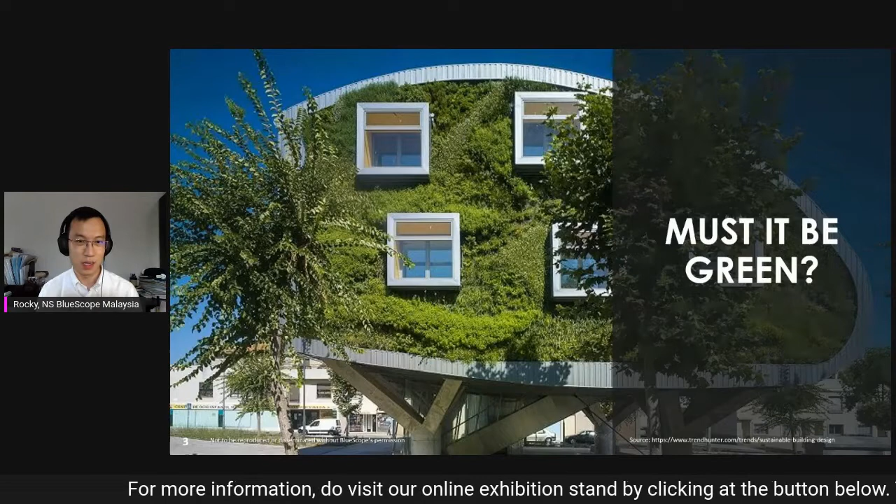All right. So just a bit of background. What are green buildings? Green buildings do not need to be green per se. They do not need to have a lot of greens, like what is depicted in this picture. It is what we call not green but rather sustainable building. So it has to have a large amount of sustainable solutions or designs incorporated within the building design.

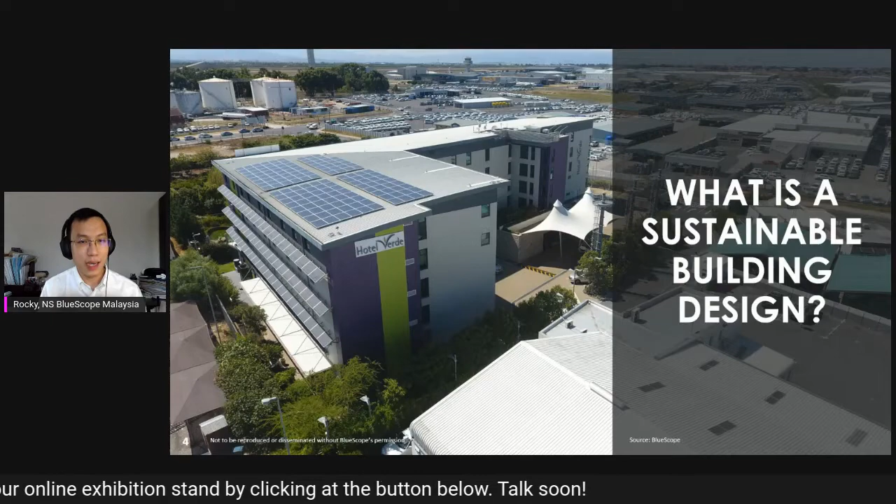Right. So of course, throughout the world, the most talked about topics are climate change, global warming, and all that. So buildings and building design play a huge role in contributing, as well as in the future helping with this reduction of climate change, and also steer the whole conversation in another direction. So of course, each country or each organization will initiate certain types of rating tools to act as a guideline for them to design a sustainable building.

So of course, some of the more recognized ones throughout the world, as well as in Malaysia, are like Green Building Index, or in the US they normally use LEED by USGBC. And of course, some other rating tools like Green RE. In Singapore, they have BCA Green Mark, and so on. Right. So these are some of the green building rating tools.

Of course, in order for you to achieve so-called green building according to these different rating tools, you might want to incorporate green building products or green building designs. So there are many ways you can achieve it. But for metal roof, of course, there are a certain set of points and a certain set of designs that are already out there for you to choose, right?

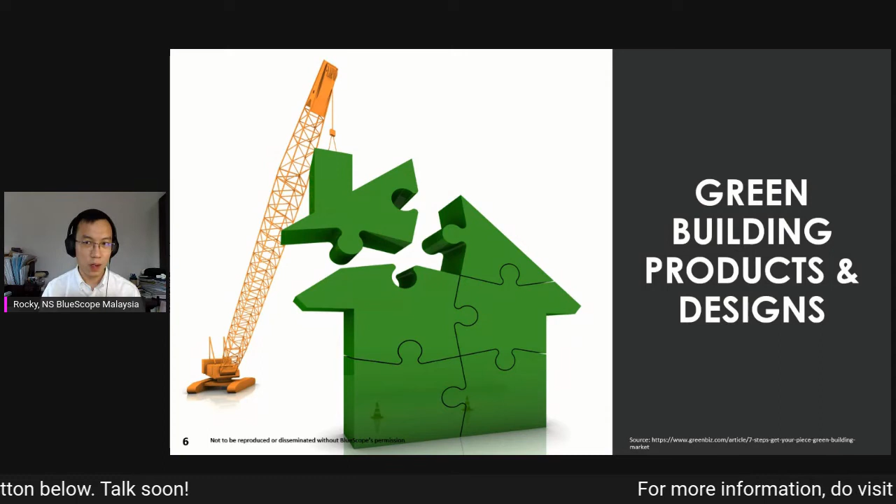So for metal roofing, you can actually look for some of the certificates that are already evaluating metal roofing as a green building product, something like SIRIM Eco Label, which can evaluate the raw materials and manufacturing process, whether it is sustainable, whether it affects the environment for the production.

Or in Singapore, they have this thing called Singapore Green Building Product, which is a certification of a product. So for coated steel, for roofing material, they do offer such a guideline of how to quantify, how to classify the product as a green product, among others, of course, as you can see here.

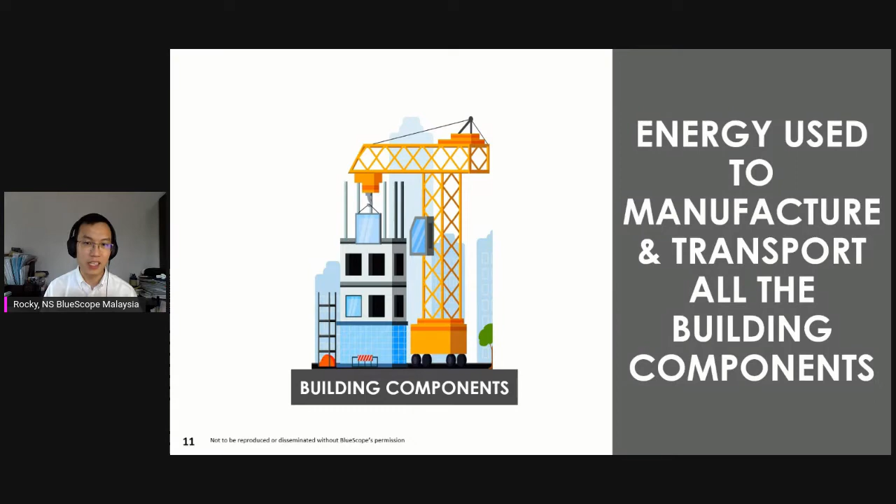Okay, so building components can be manufactured locally, or they can be imported from around the world, depending on the supply chain. So all the way until the end, when the building is constructed, all this process that I just described is part of the embodied energy: energy used to construct the whole building.

So once the building is installed, there will be constant energy supply to this building, be it to cool the building or to heat up the building, depending on the weather. But for Malaysia, it's most often to cool the building. So this energy use is part of the operational energy. And cooling is one of the biggest energy uses to operate a building, of course.

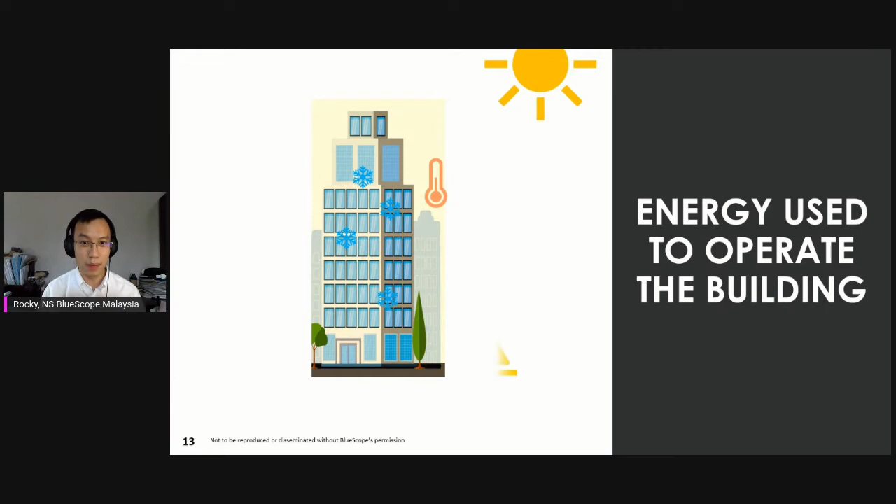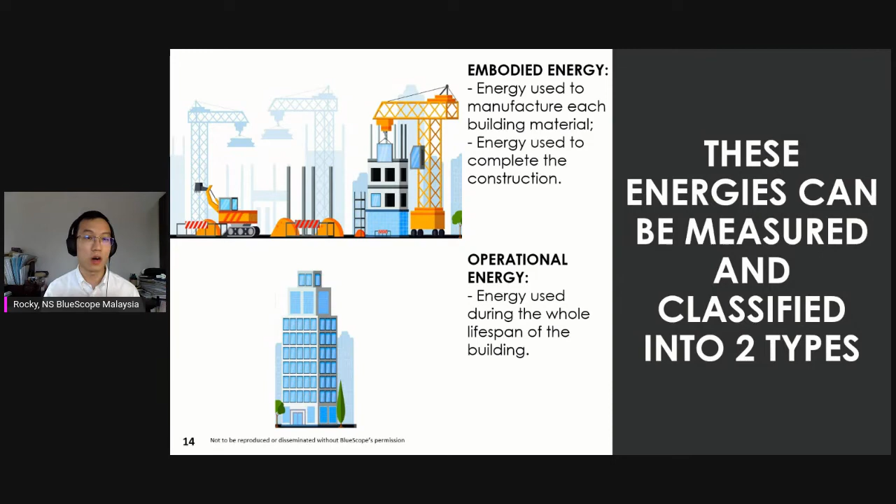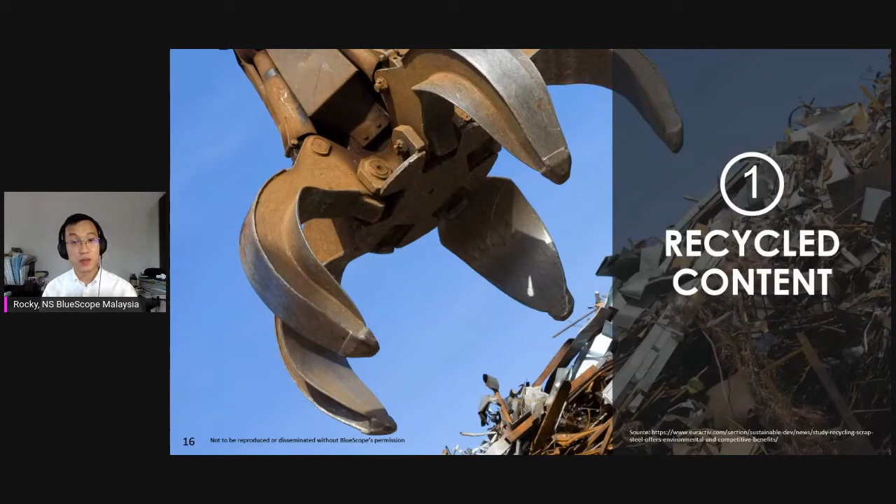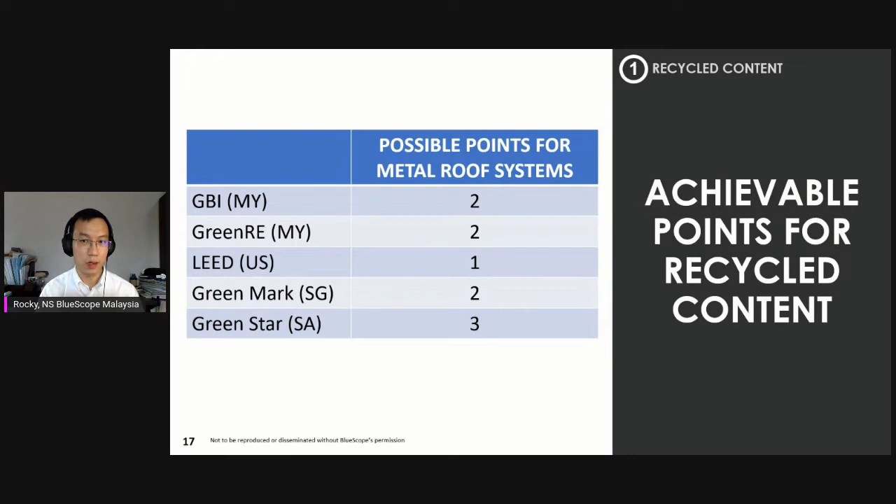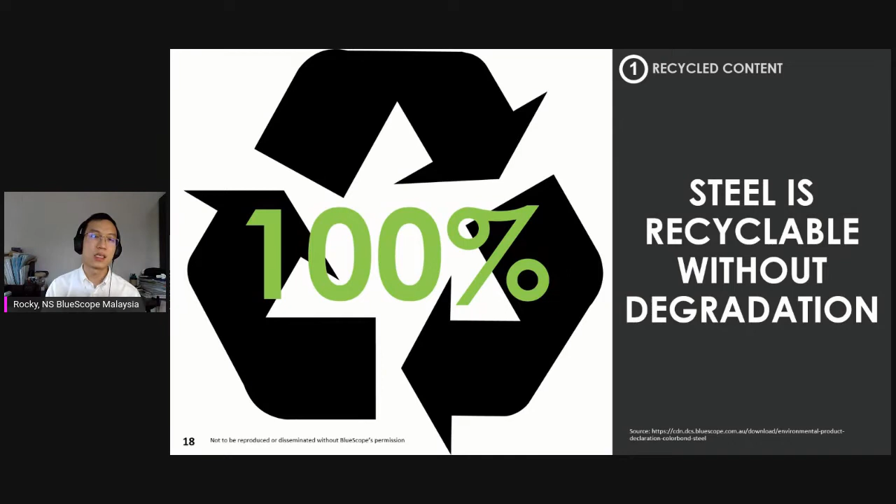So essentially for steel or metal roof, the metal itself is virtually recyclable, and steel in particular is 100% recyclable without any degradation. Meaning, the steel that comes out from the recycling process should give you 100% of the original quality. And of course, this takes into consideration the life cycle of steel.

So here I give you a brief overview, from the raw material process all the way to the usage of the steel, and all the way to recycling and putting it back into raw material production, what we call scrap. Within this process, the hardest part right now is the recycling part, because in building use it can be very hard for the scrap material to be recycled back upstream. So this is where a holistic view of recycled content needs to come in.

Recycled content can come from two parts. One is what we call pre-consumer content, where there are a lot of small offcuts of steel coming from production, from the coating line and all that. And there is another source we call post-consumer content. Post-consumer means that after the building has reached its end of life, the steel content will be recycled to become scrap. These two combine to become recycled content.

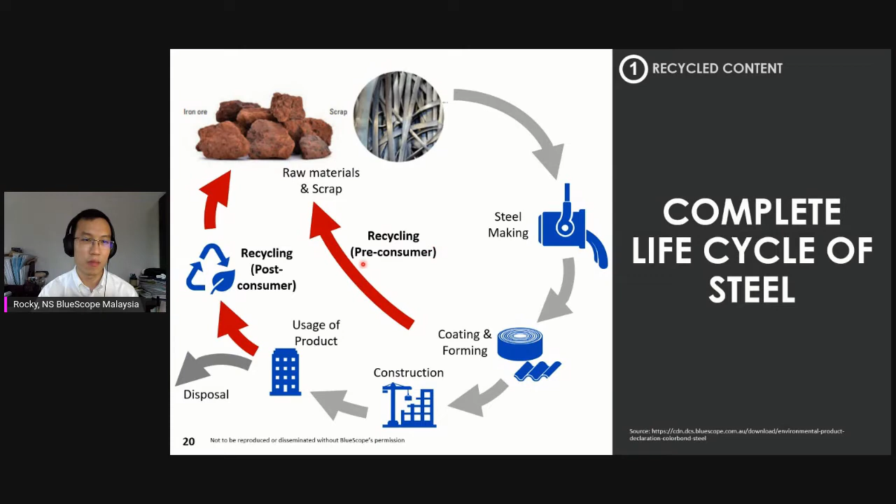And most, if not all, rating tools use a certain calculation for the overall recycled content. It's not as straightforward as adding the recycled content from here and here together. There's a formula: to calculate the recycled content, you add the percentage of post-consumer content and half of the percentage of pre-consumer content. These two add up to become the overall recycled content percentage.

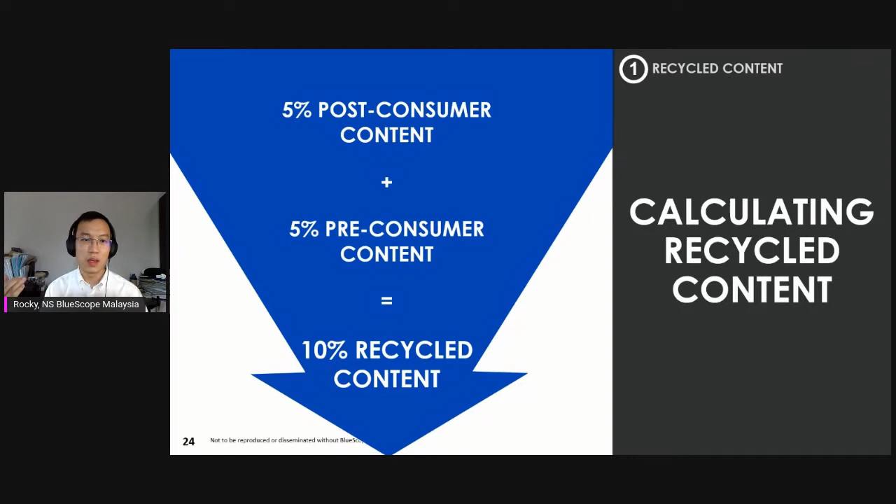So let me use an example. For a block of steel which has 5% post-consumer content and 10% pre-consumer content, the recycled content would not be 15%. It will be 5% post-consumer plus half of 10%, which is another 5%, so 10% recycled content as a whole. And if this recycled content is above 10%, you can score 1 point.

Different rating tools give you different criteria. For example, Green Building Index requires proof that your steel contains at least 10% recycled content. Green RE requires a recognized product certificate, like the SIRIM Eco Label or Singapore Green Building Cert. LEED requires a lot higher, at 25%. And Green Star, used in South Africa, requires as high as 54% recycled content.

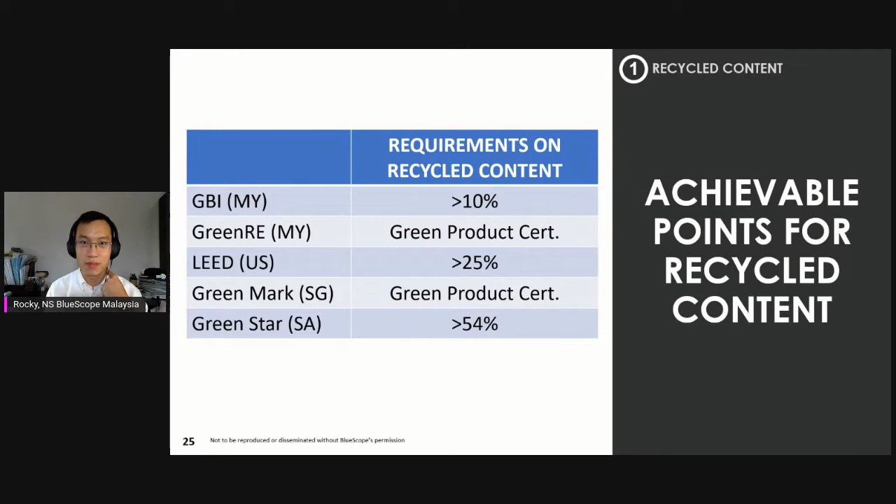So all these are relevant to each geographical location, because in some locations there is a lot of availability in terms of scrap recycling and how it is channeled upstream. Some other countries may not have that, right?

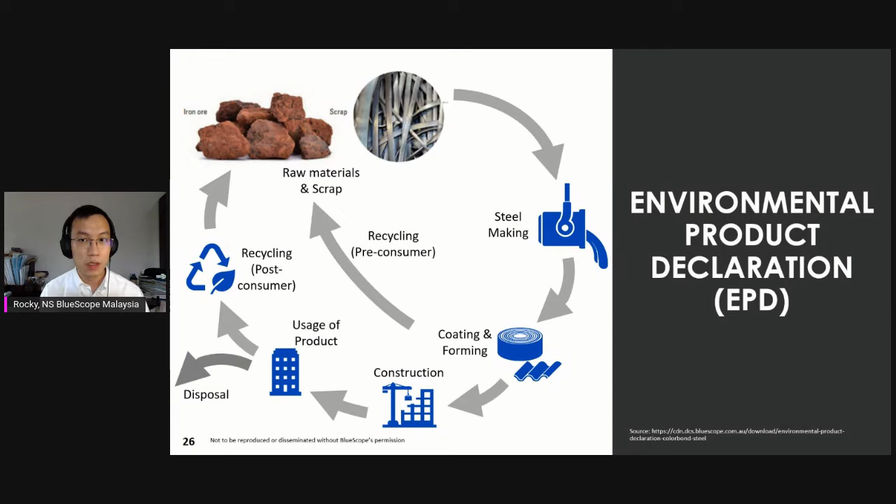So of course, moving forward, there will be a much more holistic view on recycled content. So instead of just looking at the percentage of recycled content, it will actually look at the Environmental Product Declaration, or so-called EPD.

So how this works is that EPD will look at each stage of the process, right? Because at each stage there will be energy used to, for example, melt the steel into molten metal. And perhaps in the construction stage, there'll be delivery from a truck that emits energy also, or emits certain types of pollutants. Then the usage stage, the end of life stage, and of course at the end, the resource recovery stage.

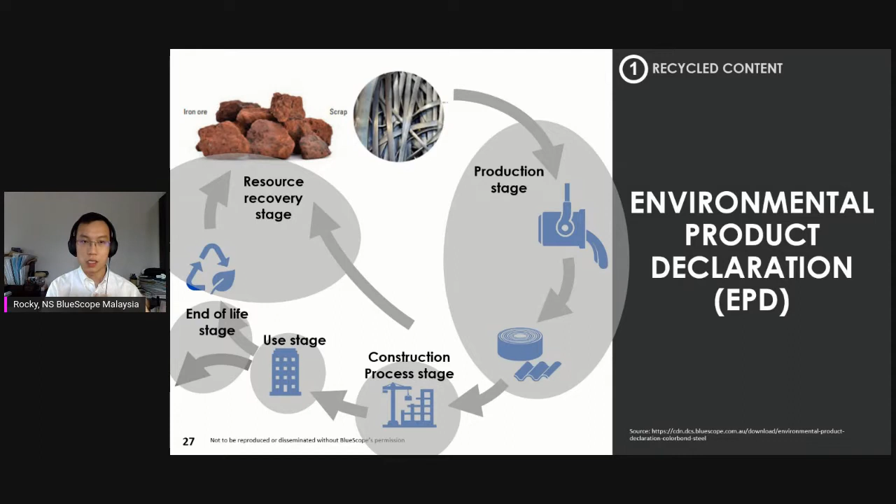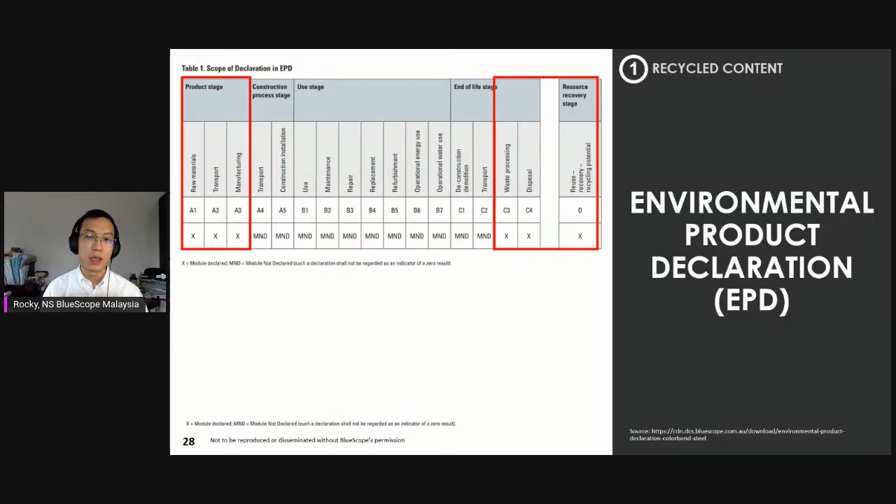So for embodied energy again, instead of looking just at the recycled content, there will be more scopes to be covered. So now there are companies, including our counterpart in Australia, who have already initiated this tracking system where they look at the production stage, as you can see from here, the end of life stage, and also the resource recovery stage. And they will look at how much energy is being used.

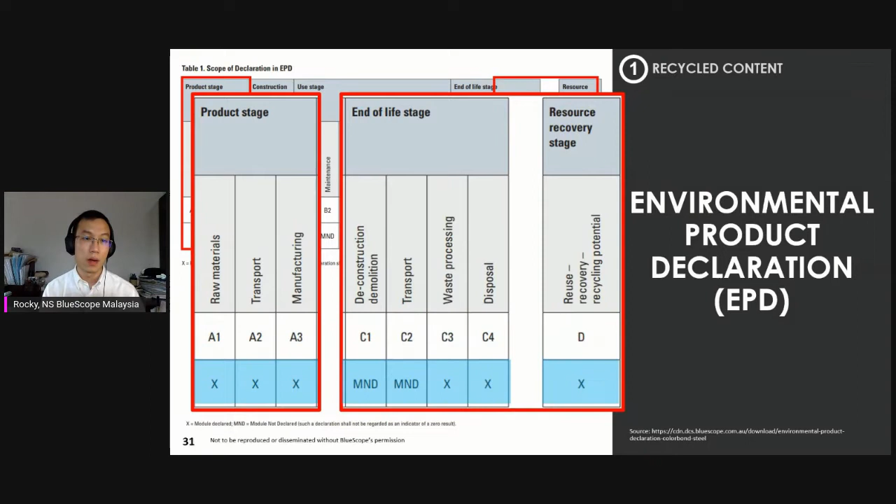So of course, there is a certain classification under a certain guidebook, which will highlight this is stage A1, A2, A3, and so on. So, for example, the life cycle that I described earlier. By considering all this energy use in different stages, it gives a much more holistic view of the embodied energy used for the whole product, from the recycling stage all the way to product usage.

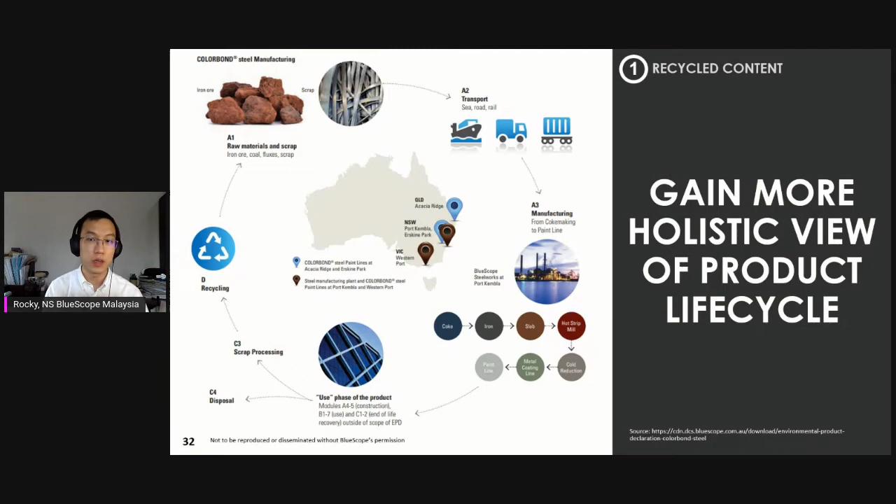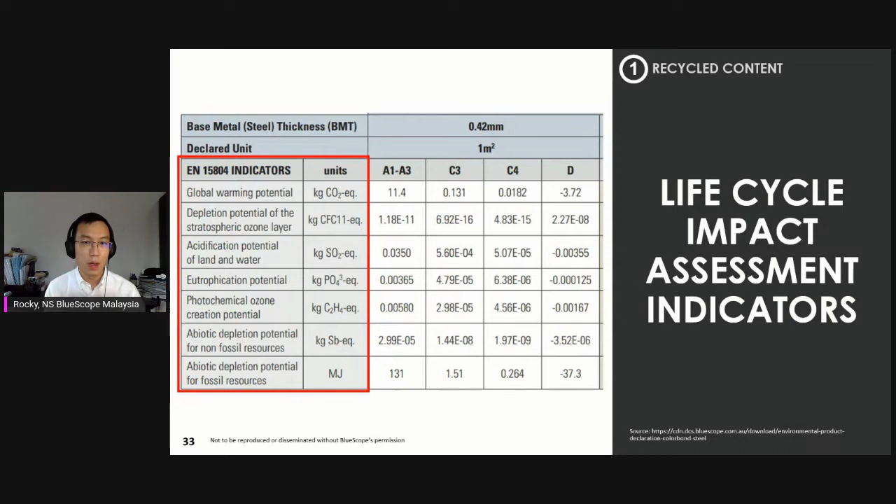So, in BlueScope Australia, this is an example of what they have done. Of course this is a future state for Malaysia, what is supposed to happen in the near future. So something like global warming potential is tracked at different stages of the products. Perhaps the so-called photochemical ozone creation potential, how likely it is to create a photochemical that could cause harm to the environment, and so on and so forth.

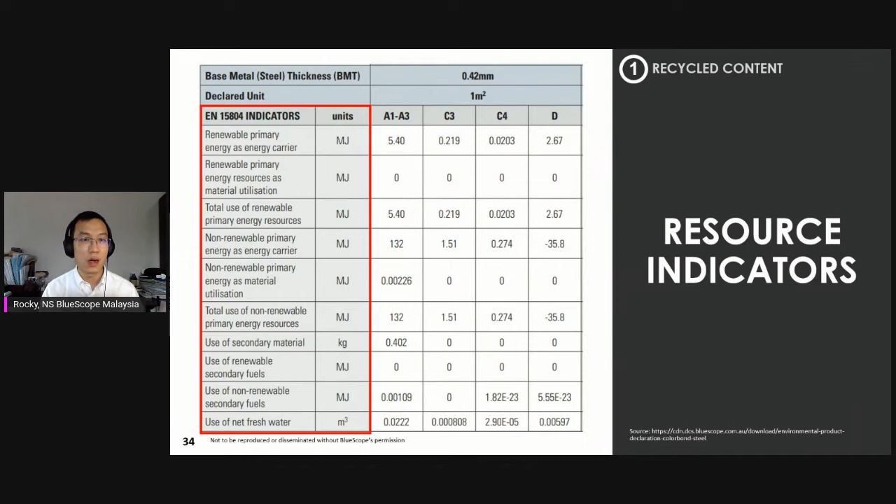And aside from that, it will also track the amount of energy used in different processes. These are very detailed processes where at each stage it will look at the renewable energy use and the non-renewable energy use, like fossil fuel or coal. So this will create more visibility and more accountability in the future, so that when people specify or use steel, they know whether it is sustainable, using less embodied energy or more. So these are some examples.

So again, to recap, recycled content is just the first step to capture how much of the final product is using recycled content. Ultimately the goal is to reduce the embodied energy. Moving to the second type of energy, which is the operational energy: how much energy is required to maintain or operate the building.

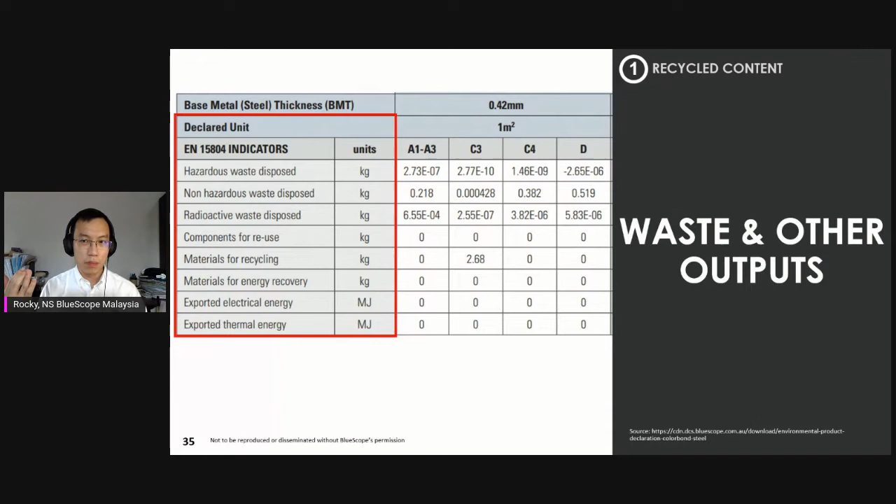So for metal roof, the point which would contribute to reducing the operational energy is solar reflectance index. Solar reflectance index works to reduce the so-called heat gain from the roof or from the facade, and is most often referred to by the acronym SRI. The SRI value of the roof or the SRI value of a certain color.

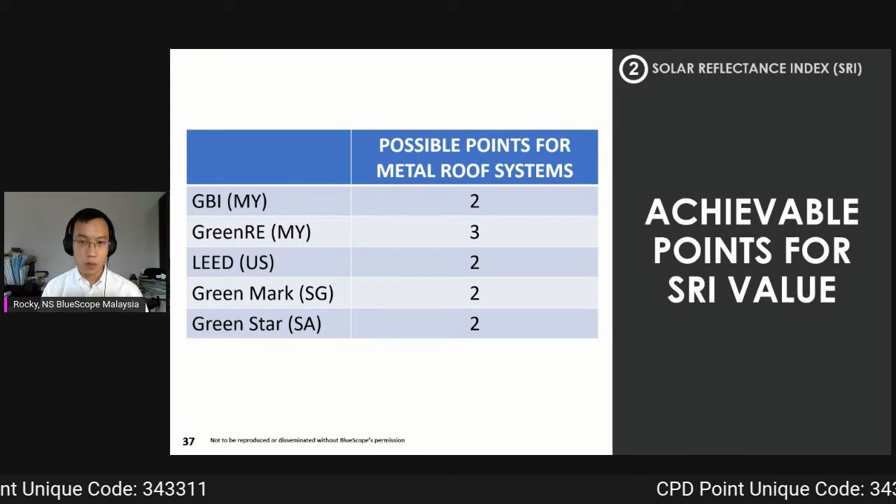So again, coming back to the green building rating tools, there will be respective points awarded if you meet a certain criteria. Of course, some rating tools might award higher than others. But what is solar reflectance index, and how does it help with reducing the operational energy?

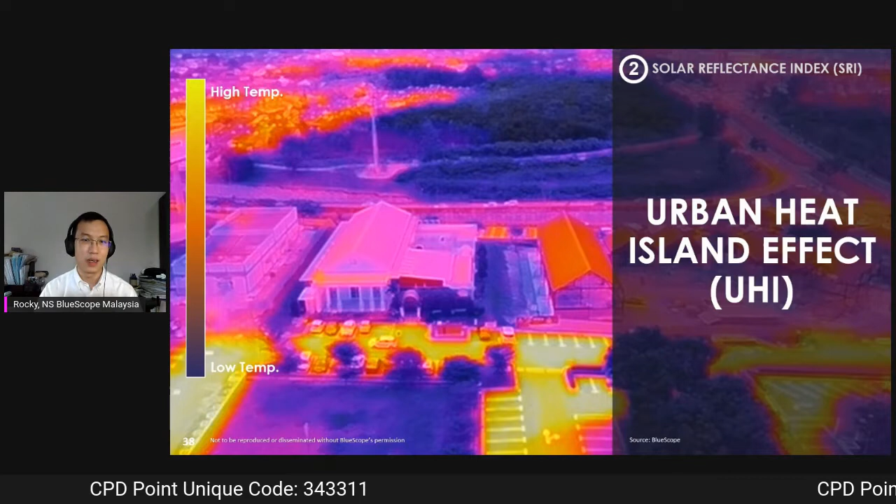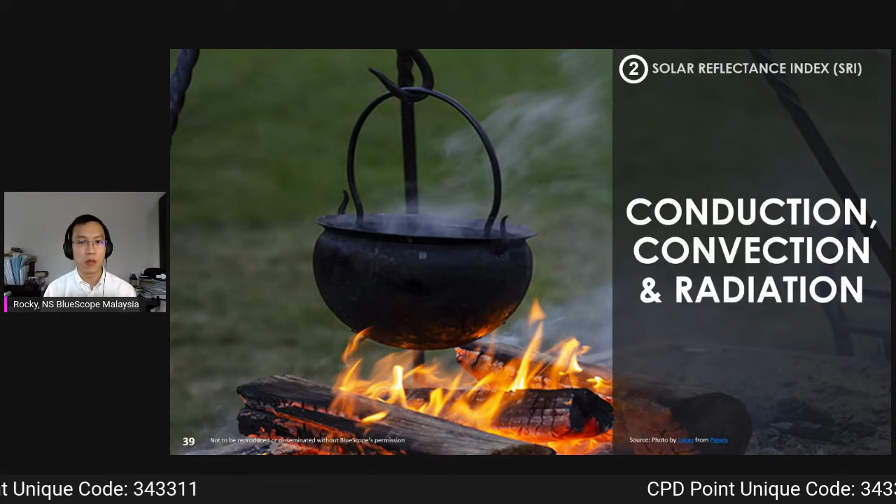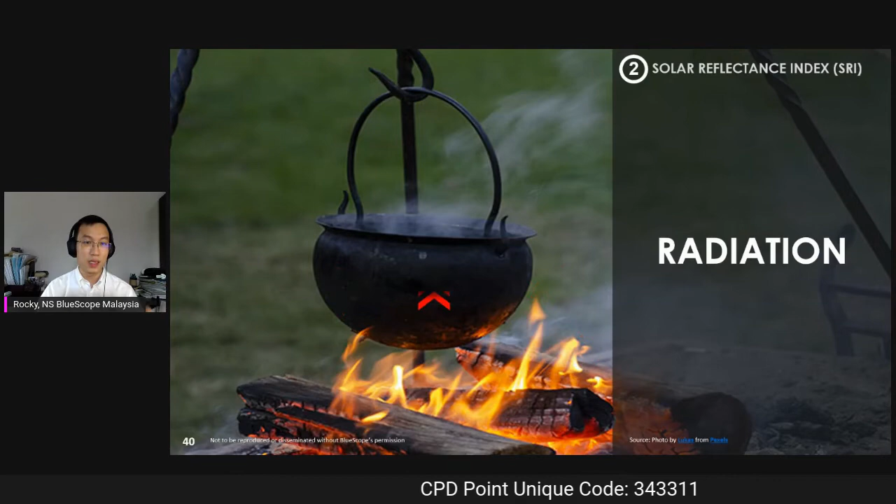So there are three types of what we technically call heat transfer, or heat gain. The first one is called radiation. Using this example, the fire is emitting heat from the fire source, which is the wood. Due to this chemical reaction, there'll be a lot of heat coming up from the fire, and the fire will radiate heat everywhere you can see the fire. Of course, the one that absorbs the most will be the one that is closest to it, and the one that is darker, which is the pot.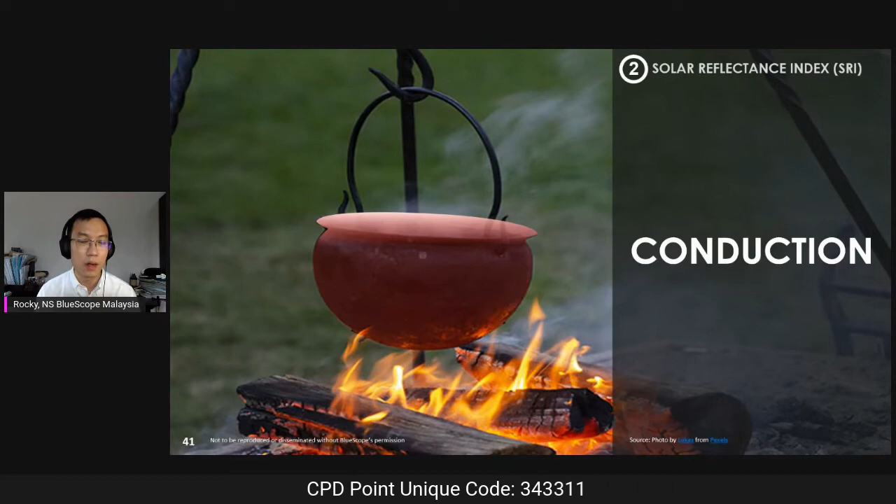And then the pot will turn hotter, so the pot itself will conduct the heat from the bottom all the way to the top. This is what we call conduction, the second form of heat transfer. And when the pot is hot, the water inside will be flowing around and start heating up itself. That is what we call convection. This also happens when the steam coming off the water gets blown away. So these are the three major types of heat transfer.

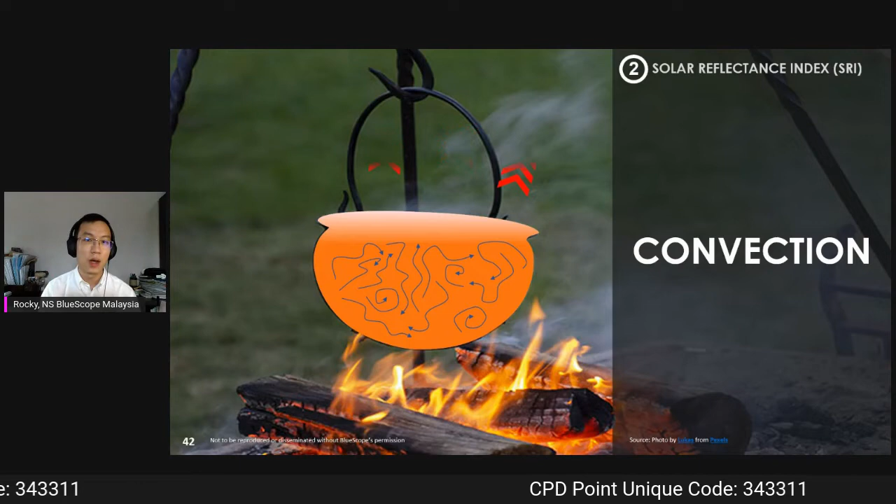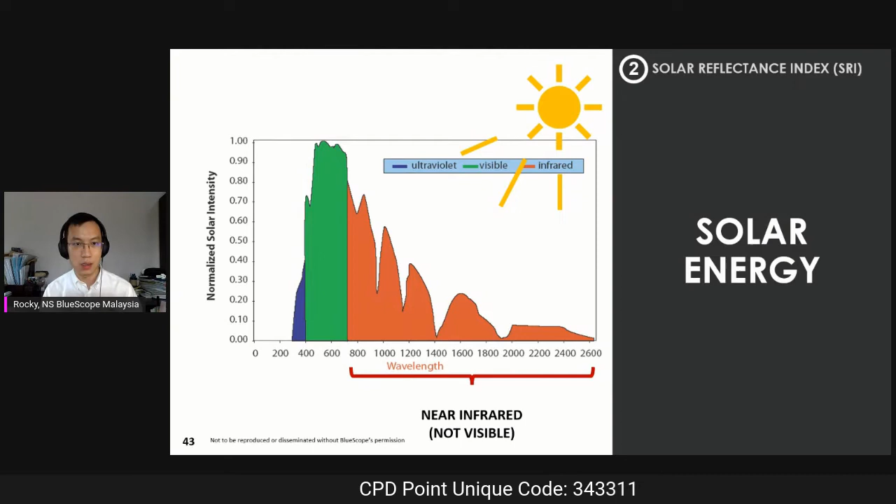Of course, when we refer to the solar reflectance index of the building, it takes into account the first one, which is solar radiation. Under the sun, there are a lot of areas of the building that are exposed to solar heat or solar energy. Here is a spectrum of solar energy emitted from the sun and reaching the Earth's surface. There are three spectrums: ultraviolet, visible light, which illuminates the environment, and near infrared. The part that you don't really see, but you can feel the heat if it's absorbed by the surrounding building components, is the near infrared spectrum.

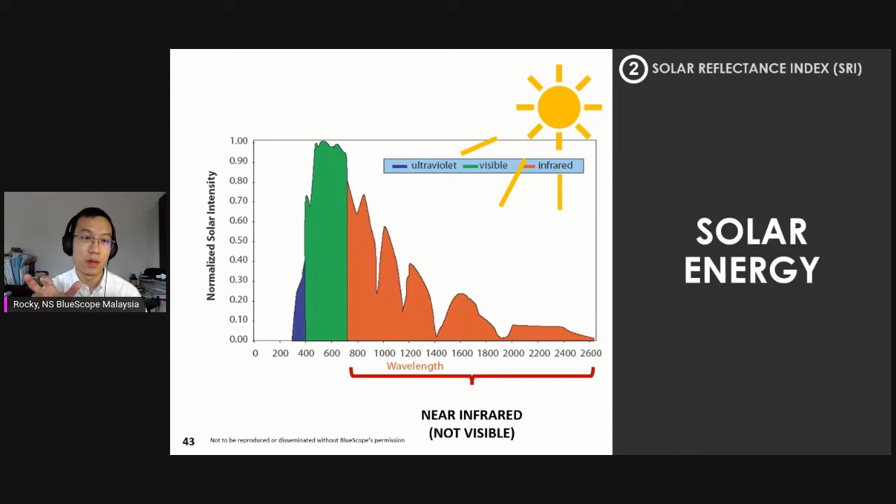So how it works is that when the sun shines onto a roofing sheet, if the roofing sheet is black, then the solar reflectance is naturally lower. What it means is that less of the solar energy is being reflected back. So with black color, the roofing sheets will have a temperature of, for example, 70 degrees Celsius. If you change the color of the roofing sheets to gray, they will be at a lower temperature, like 55 degrees Celsius, because more of the radiation is bounced back to the environment rather than absorbed.

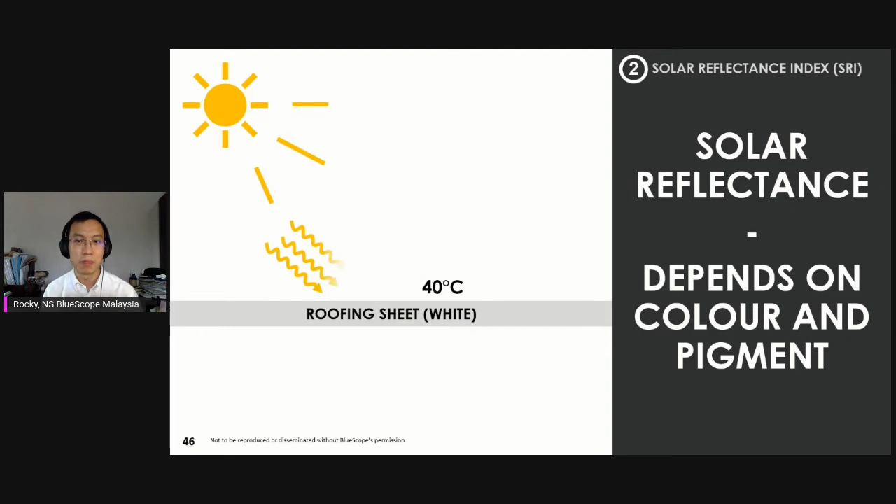The third one is if the roofing sheet is white, then the roof temperature could potentially reach 40 degrees Celsius. This would potentially reduce the heat gain of the building and subsequently release less heat to the environment. So this is what we call solar reflectance. Of course, there's a way to quantify how much heat is being absorbed from the solar energy or near infrared wavelength.

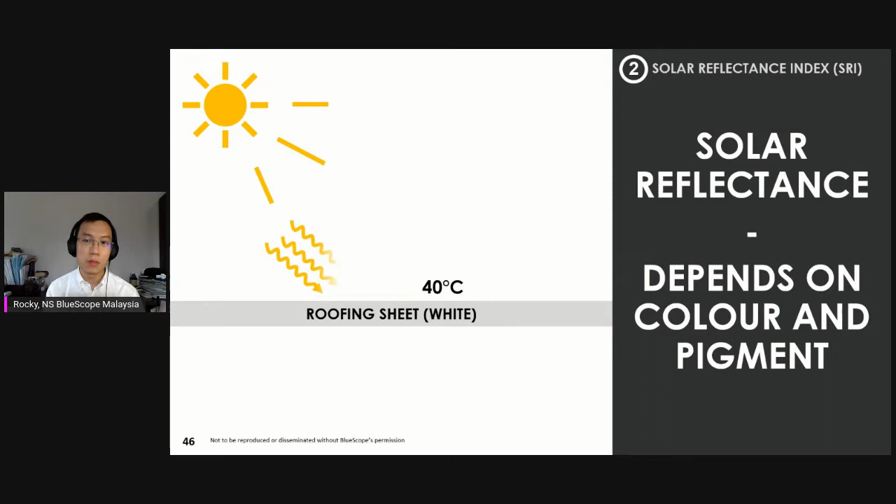So the environment, also called the air around it, would have a 65 degrees Celsius temperature. But if, let's say, you smoothen the surface, then the thermal emittance would be different, where there will be less emittance towards the environment. For example, a painted product that has a smoother surface, then the temperature that is emitted back to the environment would be, for example, 45 degrees Celsius.

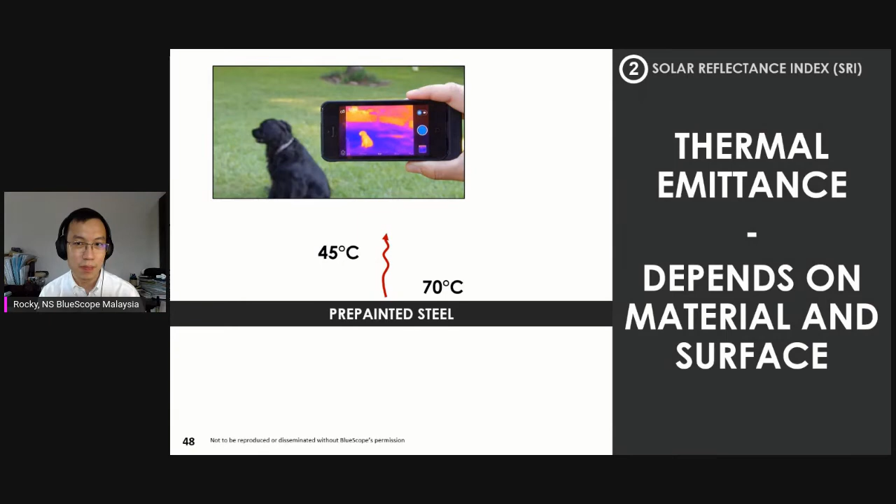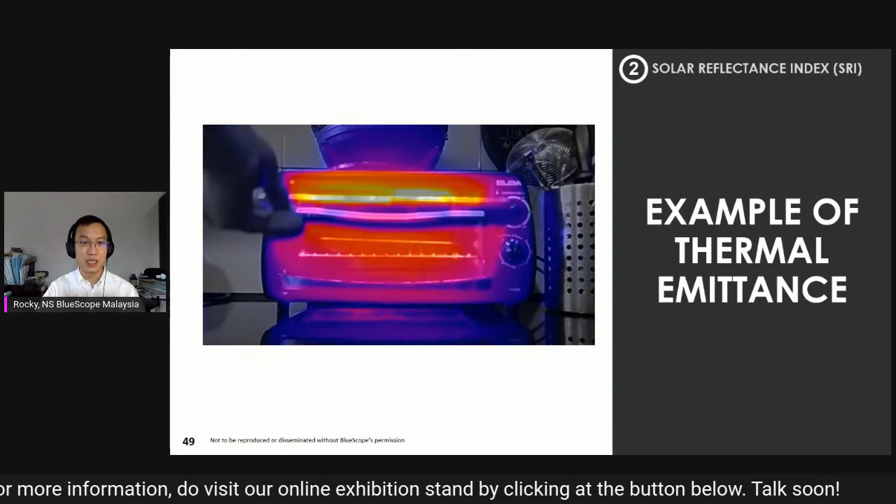So these are the two criteria: solar reflectance and also thermal emittance. These are the two that are actually used to calculate solar reflectance index. Okay, so for thermal emittance, let me show you another example. This is an example of a toaster. What you can see is that there will be heat coming from grills at the top and bottom, and there are different materials, like for example the grill, they will emit different heat compared to the glass in the front. So different materials will actually have different degrees of thermal emittance.

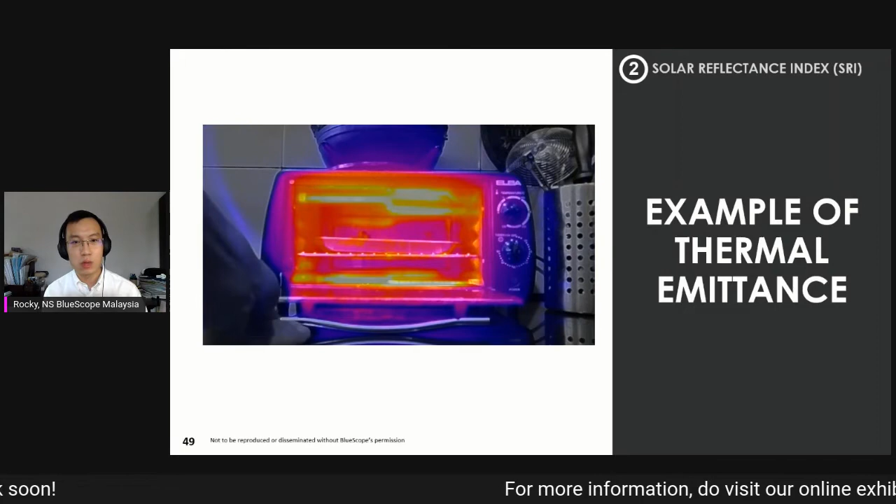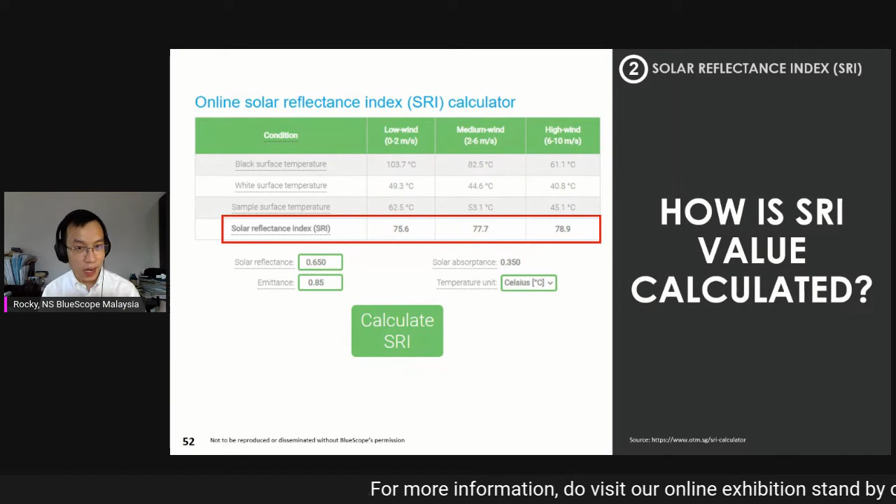So combining these two, which are measurable, you are able to calculate SRI value. So SRI value can be quantified. And if, let's say, you search for SRI calculator online, there are actually different calculators using the same or similar standards to calculate all these values from solar reflectance and thermal emittance. And typically, higher solar reflectance index or SRI would indicate that the color tends to be lighter. Or if the SRI value is lower, it normally means that the surface is darker in color.

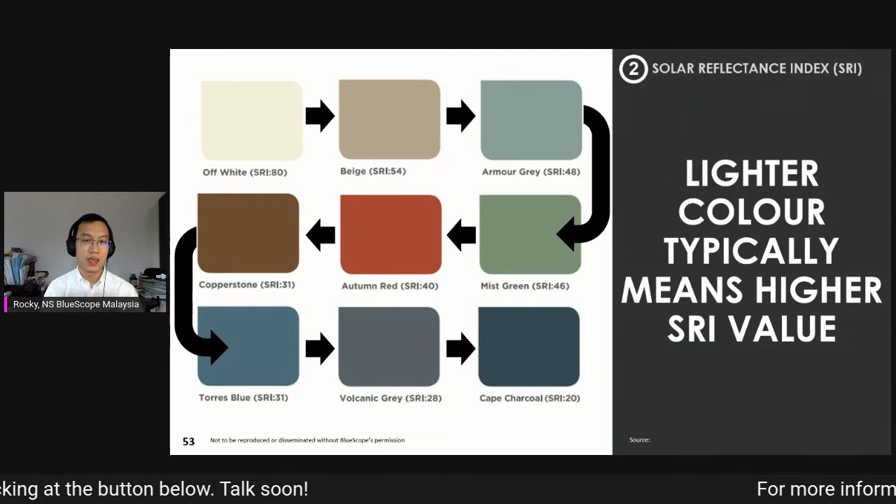So of course it is a combination of the two factors that I mentioned earlier: solar reflectance and thermal emittance. So here are just some examples of some of the common colors that we have, where you can see, starting from off-white, the SRI value is actually quite high. And as you go darker, the SRI value gets reduced. So here it also indicates that if the color is lighter, then it would have higher SRI, and higher SRI would also mean that it will absorb less heat.

Okay, so coming back to the embodied energy and operational energy, this is related to the operational energy. If, let's say, a building is cladded with roofing or cladding that has a high SRI value, then the heat gain of the building would be lower. So you will have less cooling needed within the building. So in the long term, you use less energy to cool the building, hence lower operational energy. So that's how it works for SRI value.

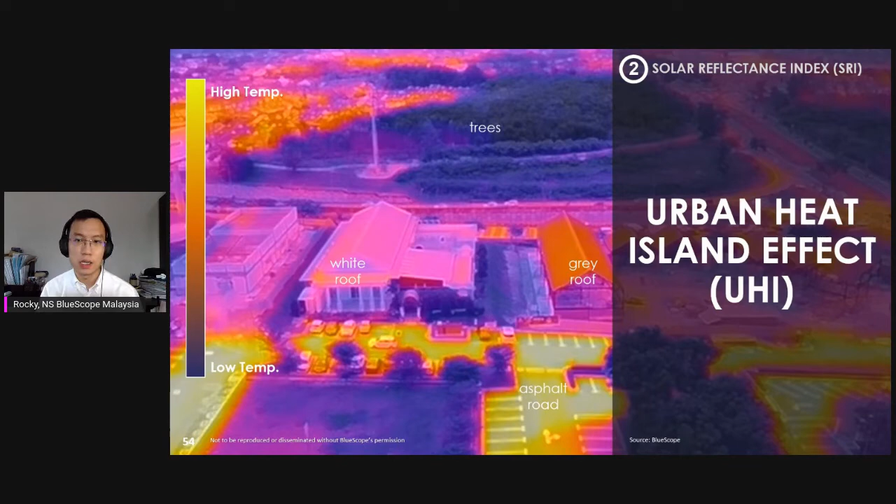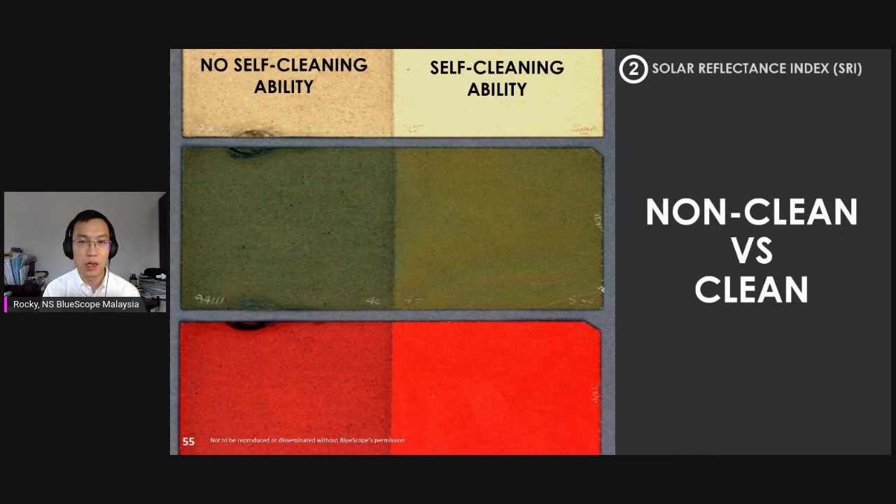So of course, for the metal roof, another thing that needs to be considered is that nowadays there are different technologies that provide so-called self-cleaning ability. If there are self-cleaning abilities to the material, then naturally it will be cleaner. And when it's cleaner, the color or appearance will also be lighter. And this would directly impact the solar reflectance index as well, where if it is able to do self-cleaning, the SRI value for the same duration of time will be higher compared to ones without self-cleaning ability. So increased cleanliness also means higher SRI, and higher SRI means that you can achieve a more sustainable building that requires lower operational energy.

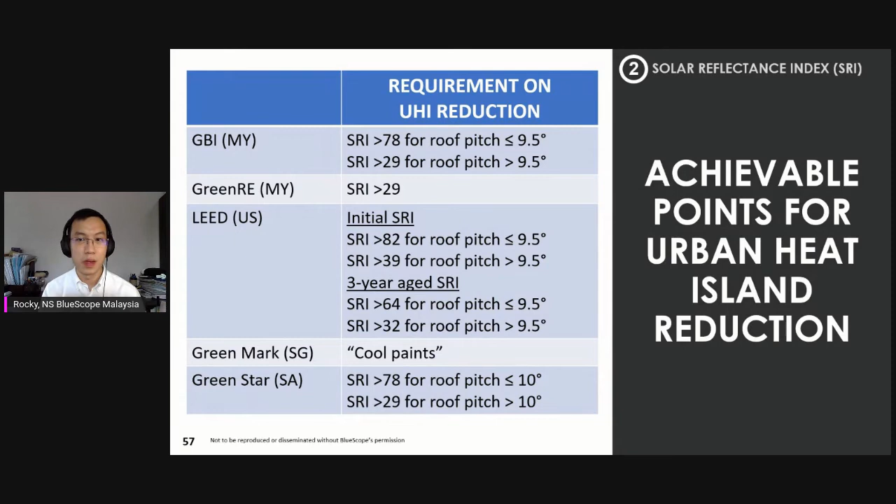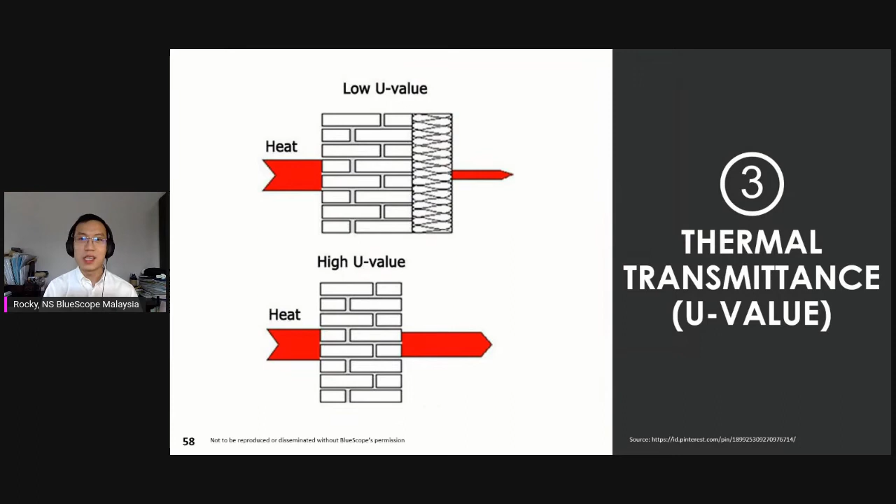All right. So the last point of it is thermal transmittance, or typically known as U value, right? So for metal roof, if let's say you use it for warehouses that do not require cooling within the building, then of course this U value would not be very useful because you will not have any insulation.

But if let's say you are designing for a house, for landed housing, or for a facade of a condo or commercial building, then U value would come in helpful to actually help reduce the heat gain through the barrier, through the roof or through the wall cladding, right?

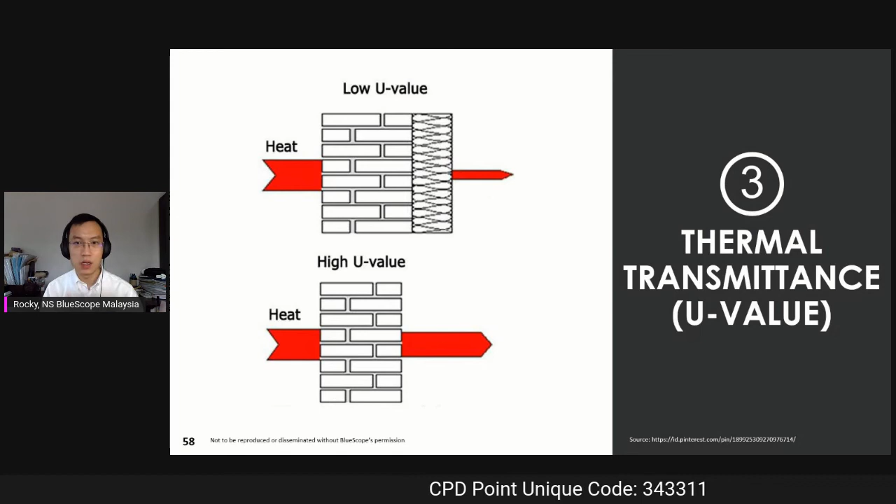So let me just go into what are the possible points that can be scored by these different types of rating tools. For example, one of the highest to be scored is by GBI. This is the highest possible score that you can achieve, 10 points, if your U value, or your roof thermal transmittance, is so low. Now you can't really imagine what this is for, but let me just explain the background behind it.

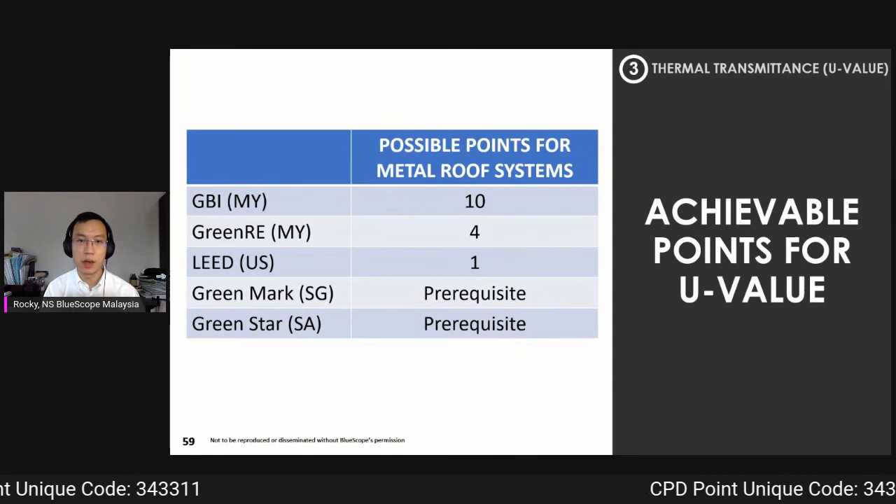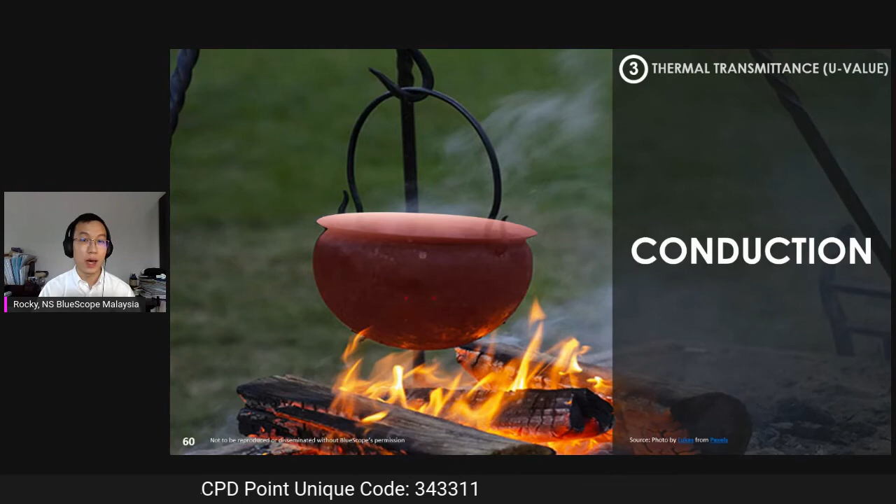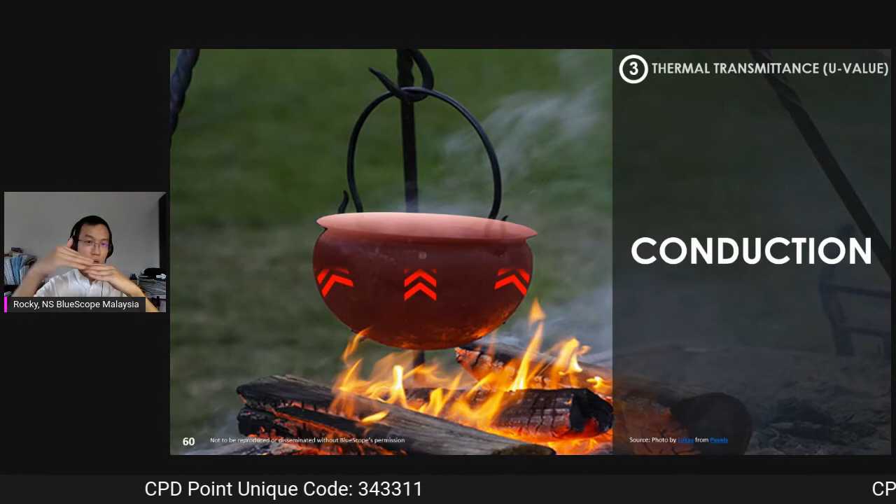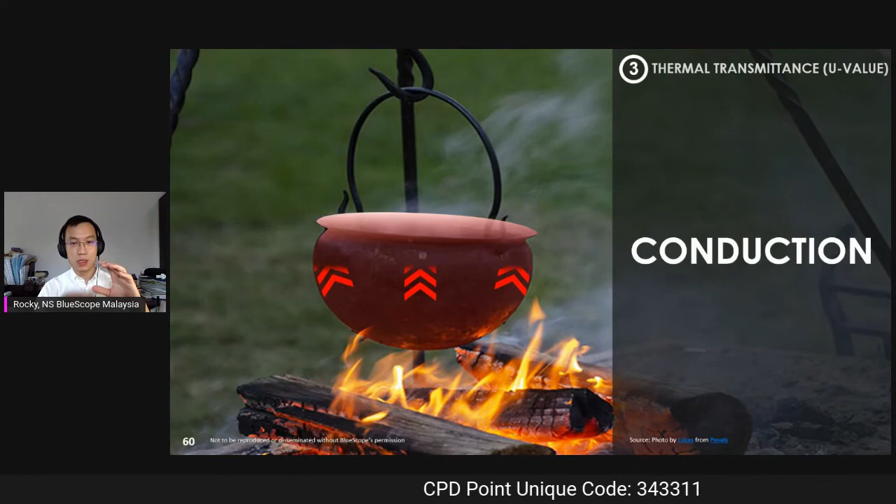So remember just now I mentioned there are actually three types of thermal transmittance. The SRI value is mostly related to radiation, the solar energy through radiation. But thermal transmittance is mostly related to conduction, meaning if there is a certain temperature on the outside of the roof, how much of the energy is transmitted through the bulk of the metal roof system and eventually transmits the heat inward. So that requires conduction.

So this applies not just to the roof systems, but also to the whole building envelope. For example, if there's cladding like what you can see here, then it applies also to the wall cladding. But mostly it is to look at the roof, because the roof itself is exposed to most of the heat gain from the sun.

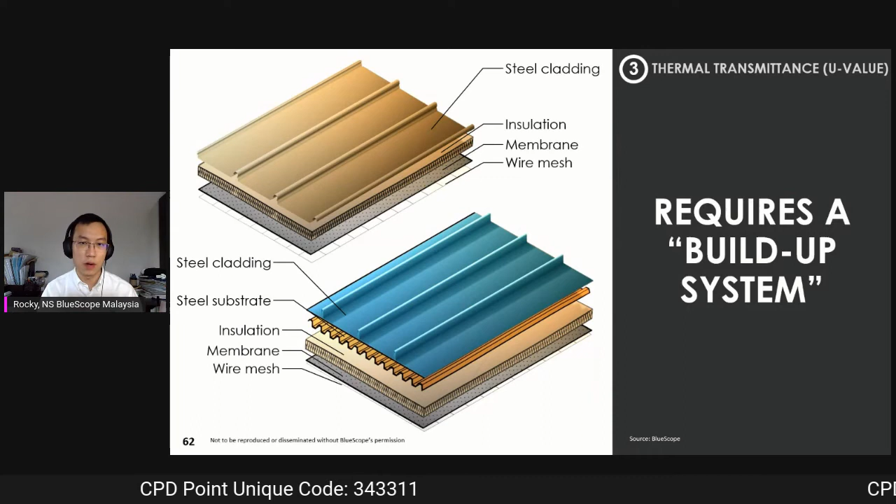So most often it also requires you to have a certain type of what we call built-up system, meaning you will need to have a certain insulation layer, and of course different insulation thickness, insulation density and so on would contribute to different U value. So here are just two examples of built-up systems, which would give different U values.

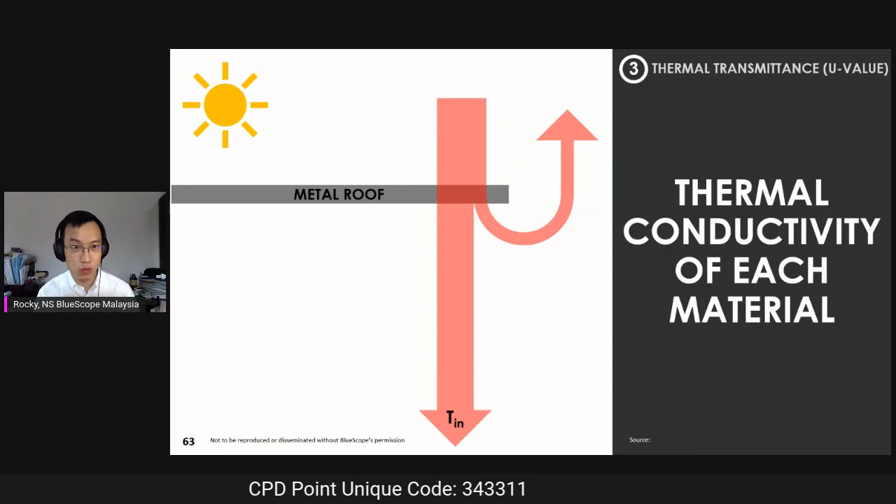So essentially, if you have just a metal roof, you will have quite a high amount of thermal conducted through the metal roof, because steel or any type of metal will most likely have quite a high thermal conductivity. Imagine aluminum, it will transmit heat quite fast compared to things like plastic. So here you can see the arrow coming down, meaning how much of the heat is conducted through the roof. Here, bulk of the heat is transmitted in.

But if you add a certain amount of insulation, then less of the heat is conducted through the whole medium, and most of it will get rebounded back to the external. So again, this thermal transmittance or U value actually contributes to lowering the operational energy of the building.

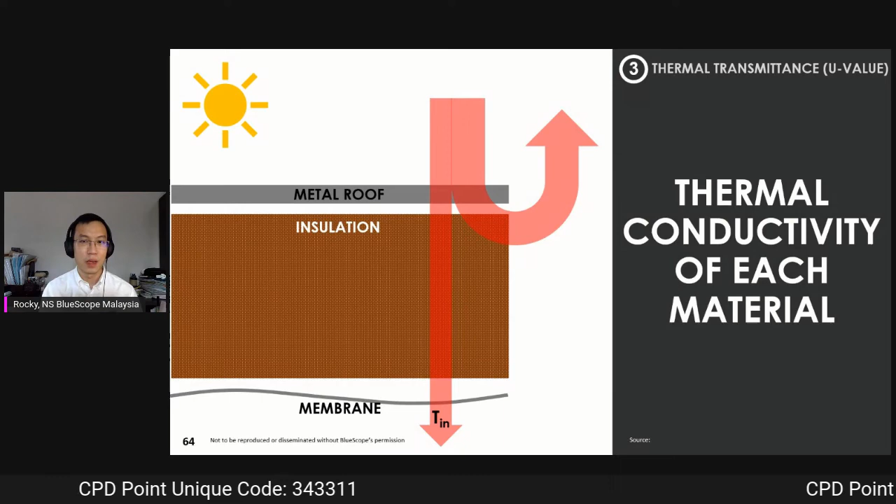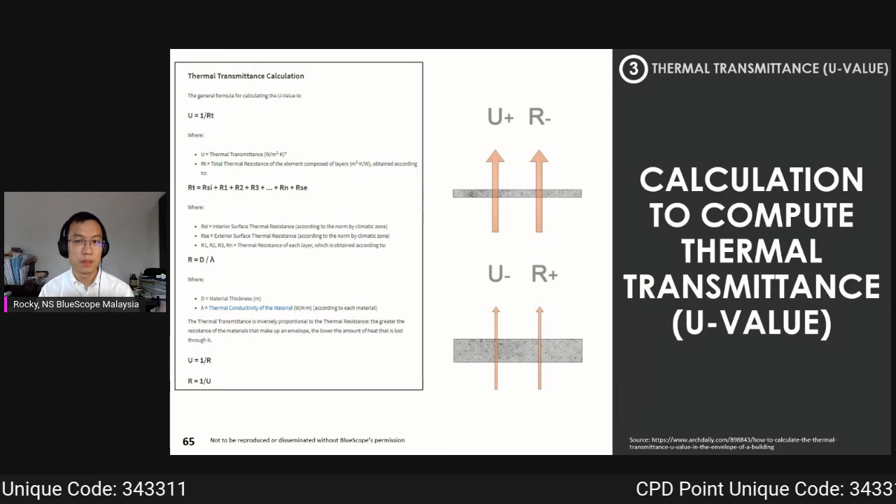Okay, so how it works is that the U value can be calculated based on a system. If you have a higher U value, as you can see on the right, U plus means higher U value, then the thermal transfer conducted through will be higher. So typically the thicker you have, the less heat is transferred. Again, different build-ups will contribute to different U values.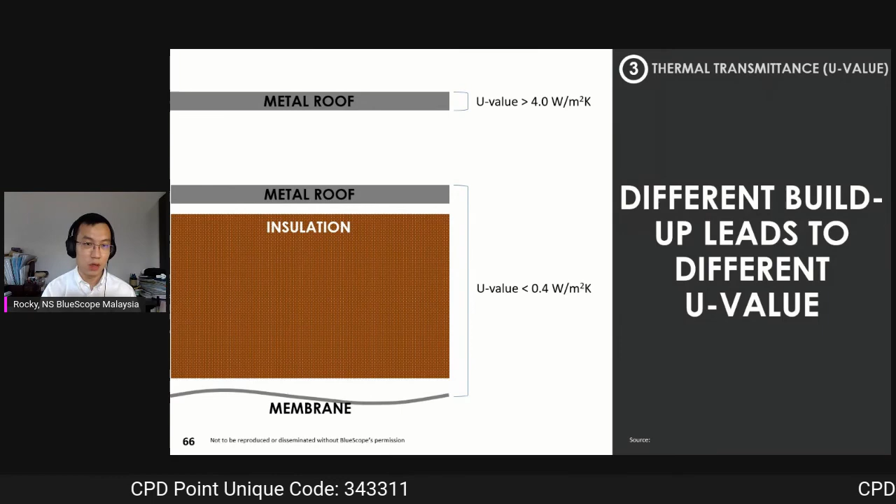So for example, if you have a single roofing sheet, the U value will likely be easily more than 4 watts per meter square Kelvin. This is the unit of U value. If you incorporate a certain level of insulation, the requirement mostly quoted in these rating tools would be lower than 0.4 watts per meter square Kelvin.

And if you can achieve a certain U value, like I mentioned, 0.4 watts per meter square Kelvin for GBI. Green RE requires 0.35, even lower. Actually, I forgot to mention, the lower the number for U value, the better, because a lower number means less heat is transmitted through the whole build-up.

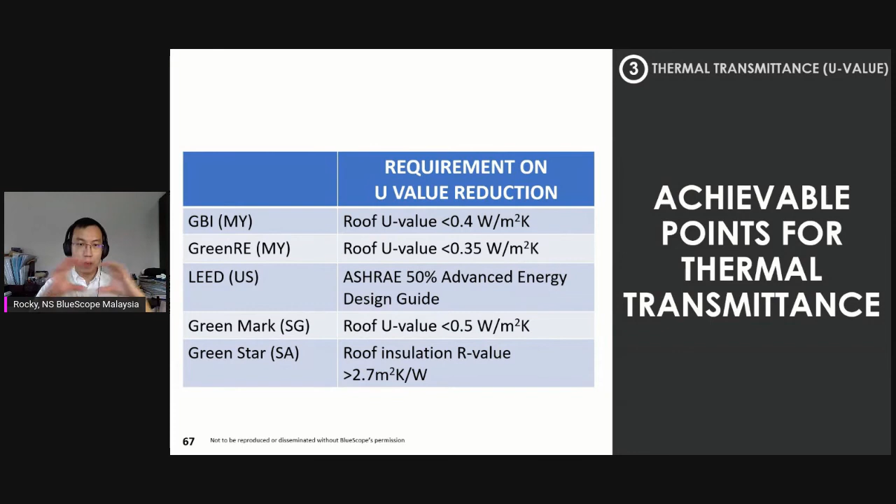For example, over here, if a roof build-up has a U value of 0.4, compare that with another roof build-up with a U value of 0.35. Then the one with 0.35 will actually transmit less heat through the whole build-up compared to the one that is 0.4.

Okay, so of course, if you want to achieve all that, there will be a cost that you need to incur, because you might need to have slightly more cost to finance that improvement. So of course, in Malaysia, there are still incentives by the government to incentivize people to go green, right? If, let's say, you invest in green building technology, or your building is certified and so on, then you can actually apply for this green investment tax allowance. So it will actually lessen your burden on financing all this green building.

Of course, you can actually go to the website of MIDA, right, as you can see from the source, to ask for more of this information or how to apply for this, right?

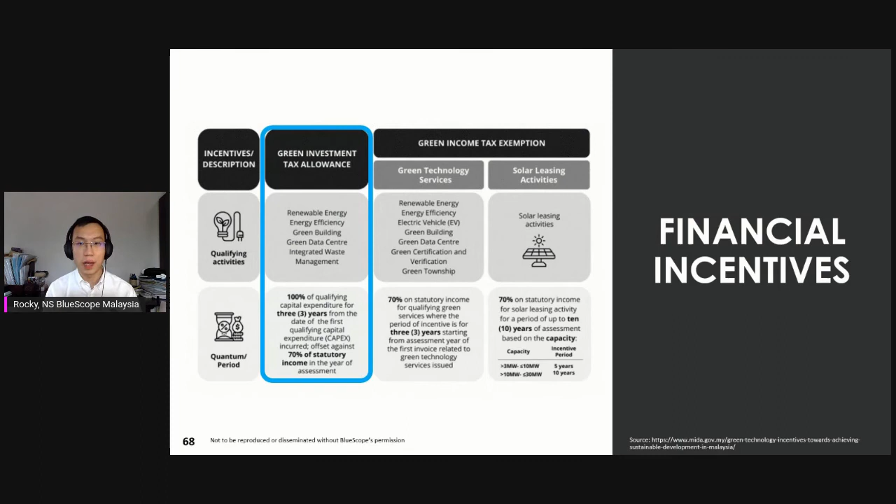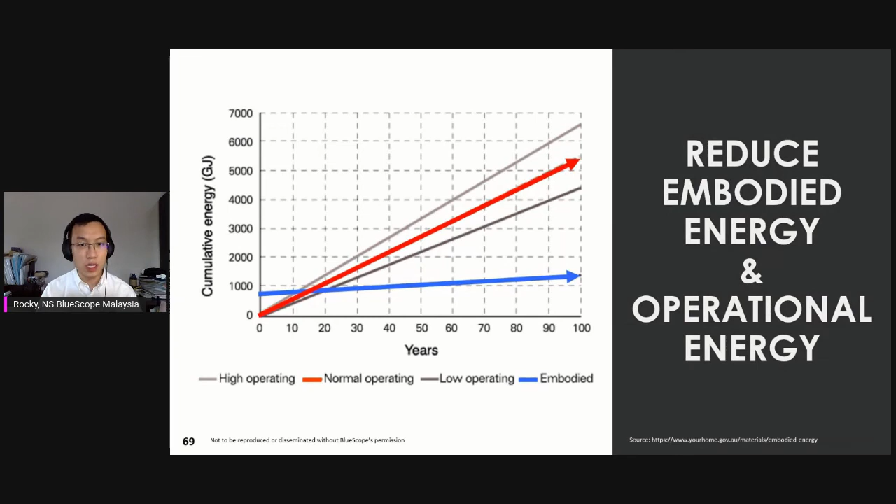So all in all, the intention of these 3 points, even though on paper it is to achieve green building status, the tangible impact it has on sustainability is that it will actually reduce the embodied energy as well as the operational energy, so that first, you will require less energy to produce the product, and second, it requires less energy to operate the product.

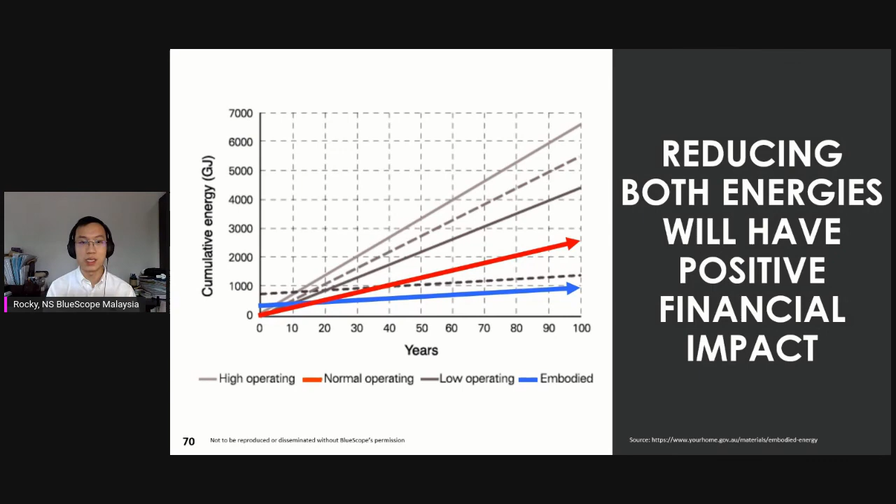So even though you might need to invest more upfront, the end result is that you would actually have a long-term positive cost impact if you operate the product in the long term. So of course, when we want to go for sustainability, it is always to take the long-term view, and these are some of the aspects where you can invest to make sure that your building is future-proof, meaning you achieve sustainable building at the early stage when you are doing design.

Right. So to summarize, there are actually 3 points that I highlighted today. The first one is recycled content. These are segregated into two segments, where the first one is related to reduction of embodied energy, and the second and third points are to reduce the operational energy of the building.

All right. So recycled content. We talk about steel or metal roofs that should incorporate a certain level of recycled content, and based on different rating tools, there is a certain minimum threshold that you need to achieve. And I would say steel products are easily 100% recyclable. So it just depends on the source, and also the available technology out there to recycle the material, right? So you can look into different suppliers to feed you that information.

And of course, there are things that need to be accounted for, like the life cycle analysis of the product, right? How much energy is used to produce the product, how much energy is used to recycle the product, and so on. That needs to be seen in a holistic manner.

In terms of the operational energy, we talk about solar reflectance index, which looks into the color of the roofing sheets, right? And also how likely it is to get dirty, and so on. So it will contribute to what we call the solar reflectance index, or SRI value. And typically, a higher SRI value means better, lower heat gain from the solar energy, right?

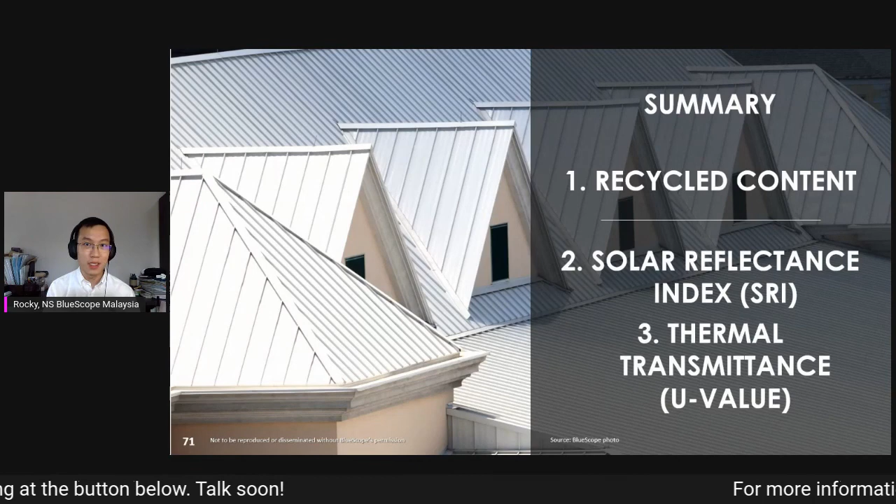All right, so different rating tools also give you different requirements, so you can always explore which rating tools you are following, and achieve those points according to your design.